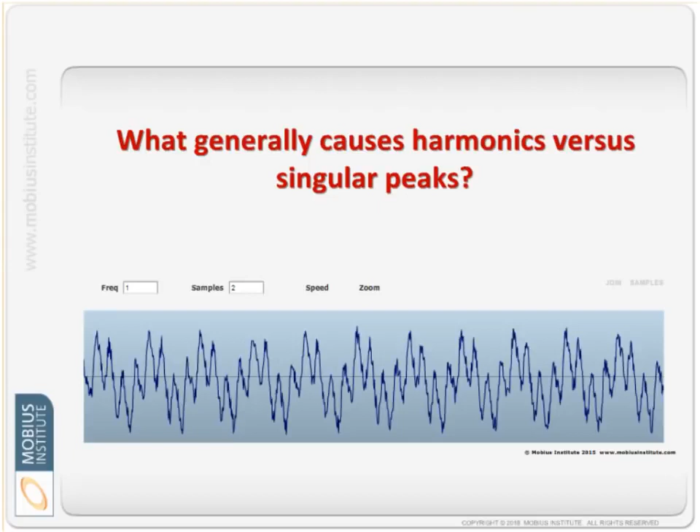They're little harmonics, but they are harmonics. So if there were stronger impacts, we would see actual harmonics that are much higher in amplitude. So what I thought I'd show, if it was a time waveform that looked like that, not purely sinusoidal, we would see harmonics for sure.

Now I'm going to use a little simulator that is there to demonstrate what happens when bearings are damaged. Just bear with me for a second. So what we're seeing over here, there's the sine wave of just the shaft turning and the bearings are just fine. But if I have a little bit of damage on the outer race here, then each time the rolling element rolls over that area of damage, we get this little spike.

Now the way this simulator works, it's just trying to say, hey, if it's just a tiny little spike, you may not see anything in the spectrum. But what I'm going to do is make the spike much worse, and you see these harmonics come up.

And in fact, we can just isolate the spikes, and that's what's causing these peaks. Now, in this instance, the frequencies generated aren't harmonics of 1x. This is my 1x peak, my running speed peak. So there would be 2x, 3x, 4x, and because it's a rolling element bearing, I'm actually seeing harmonics of 4.22 - I happen to know that. So at 4.22, 8.44, 3 times that, 4 times that, 5 times that, we get peaks in the spectrum. That's probably enough said about harmonics, but that's why.

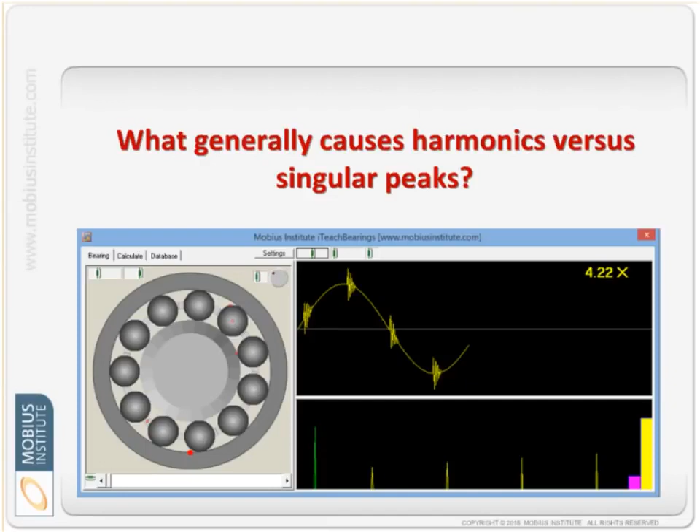So anytime you see harmonics in the spectrum, you've got to think, what is happening inside the machine? Is it just slight distortion, which gives weak harmonics? Distortion because as the shaft rotates, maybe it's more stiff vertically than horizontally, so it gets a little distortion, like it's not a pure sine wave. If you see really strong harmonics, you've got to ask yourself what is impacting.

Why does mechanical looseness generate multiple harmonics of 1x vibration? I kind of just answered that question. Mechanical looseness involves impacting, either within the bearing itself due to excessive clearance, or between the outer race and the housing, or even just the machine as it vibrates up and down. We might have impact - there's rotating looseness, mechanical looseness.

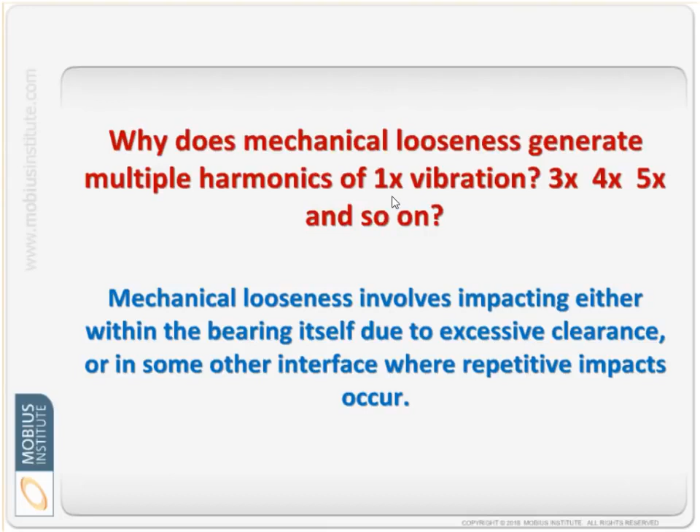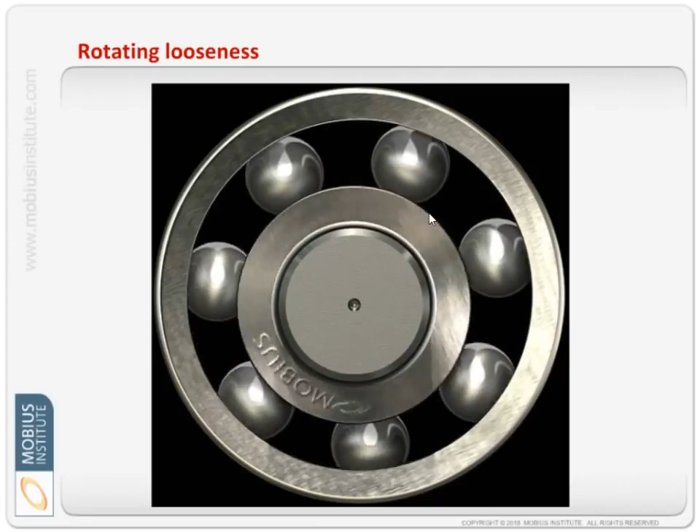But anytime we have, for example, a once per revolution impact, we will see 1x harmonics - peaks at 2x, 3x, 4x, and so on. In this animation, hopefully you can see, as it rotates, this impacting going on, and that could happen also between the outer race and the housing, if it's loose. My animations are really exaggerated, but when there's looseness, we get that impacting.

Now, I've mentioned the word 1x a few times, and the question is, can you elaborate a little more on 1x, 2x, etc., and running speed? What is that, and how does it correlate to determining where on the machine the fault is located? So, number one, 1x simply means 1 times the running speed of the machine. Let's say we've got a motor turning at a particular speed in CPM - you often quote it in RPM, but a lot of people work in Hertz as well. So it has a speed.

Well, because a lot of fault conditions occur as the shaft rotates once per revolution - for example, unbalance, we get this force once per revolution, as you'll see in a moment. Rather than quoting what it is in CPM or Hertz, which is meaningless unless you happen to know the speed of the machine, it's easier to just say 1x, 1 times the running speed, 2x, 2 times the running speed. For most vibration analysts, as soon as you say there's a big peak at 1x, their mind goes in one direction. Oh, the vibration at 2x has increased - their mind goes in a different direction. 3x, 4x, 5x, same thing.

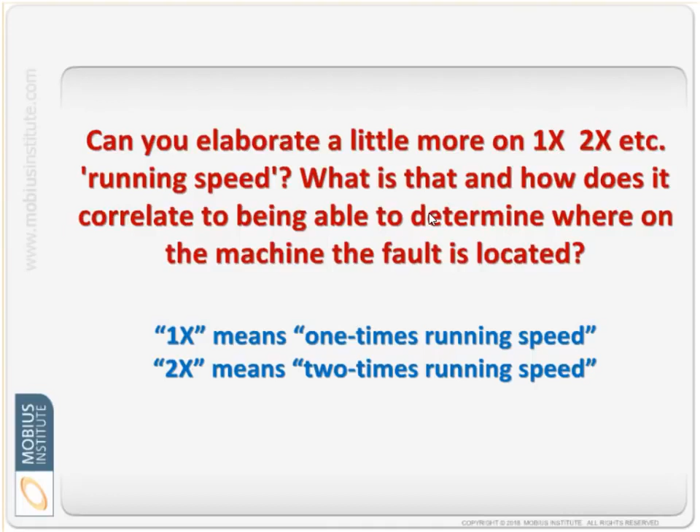We know what that means - we don't need to know what the speed of the machine is. But if someone said to us it's going up at 2,900 and something, you'd have to say, well, I'm going to assume I know what the running speed is - it takes an extra step. So that's the first part of the question.

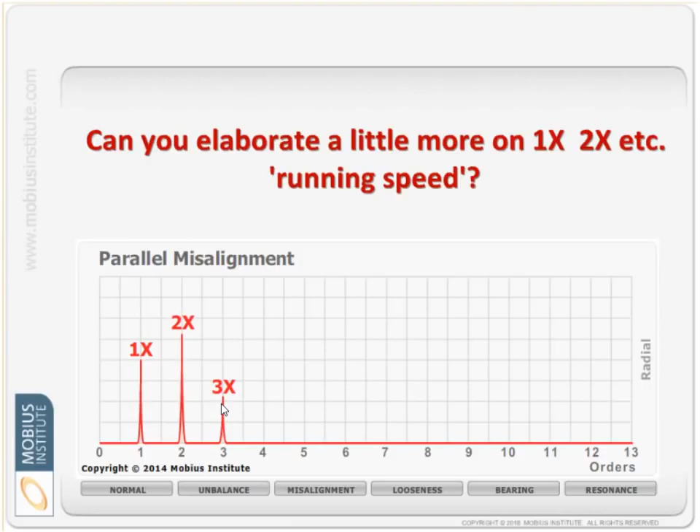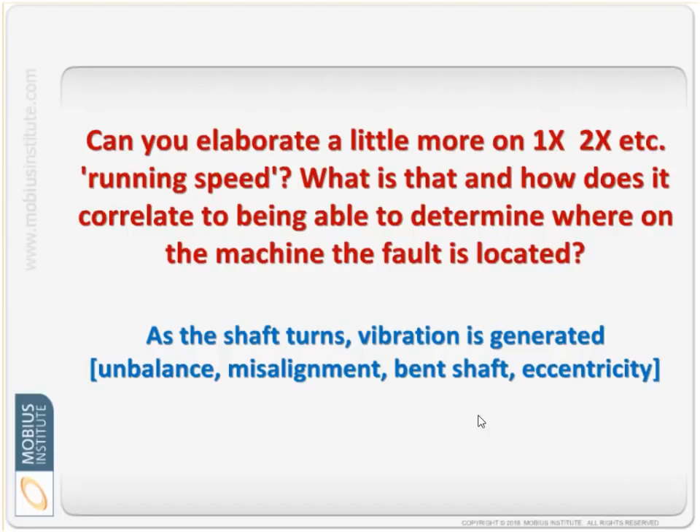So, number one, in terms of the 1x vibration, we often see that because of unbalance, in some situations misalignment, if the shaft is bent, if there's eccentricity, and really anything where once per revolution we've got some sort of force. Normally, even with just a normal machine, we will see vibration at once per revolution at 1x. You'll never balance a machine so well that there is no vibration. It may not be obvious in some cases which peak is the 1x.

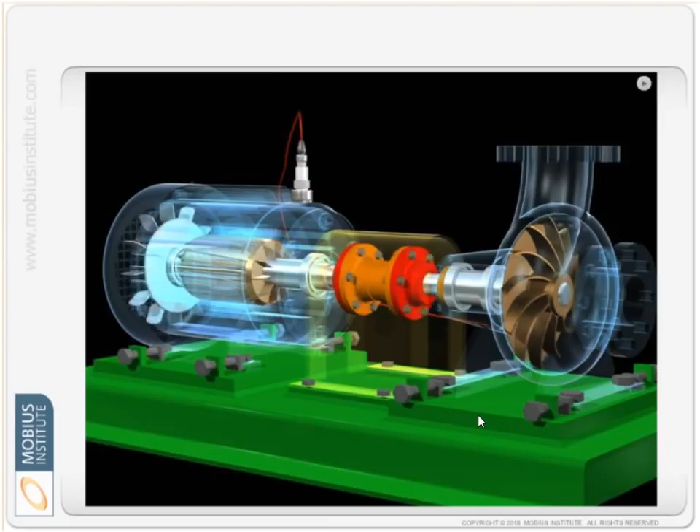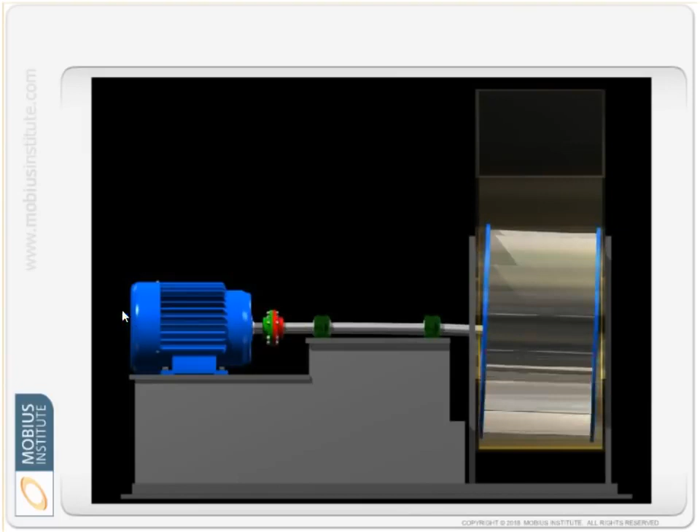If, for example, we have a fan, because of unbalance, once per revolution we've got this centrifugal force that makes it wobble, as you can see there. That impeller is actually turning in a circular motion, but it's also rocking back and forward axially. So we would see vibration both axially, if we measured in that direction, but also radially, vertically and horizontally. We would see 1x vibration.

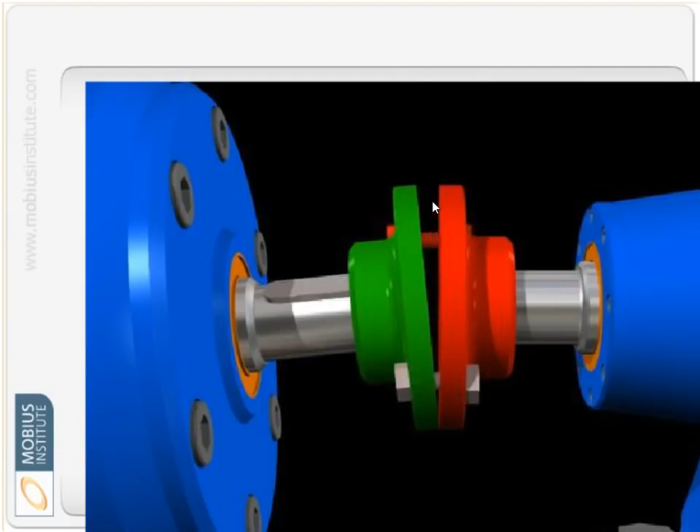In this case, this isn't the best animation in the world, particularly with that great big key there, but if there's angular misalignment, then once per revolution, what I'm trying to show is that the bolts are being stretched at the top. This is obviously very exaggerated, but just to make the point that once per revolution we've got this force in the axial direction, and we can see high 1x in that case.

Now, we can have actual forces that generate the 2x and 3x vibration, but again we can say, due to the misalignment, or for example a cocked bearing and a bent shaft, we can see vibration at twice running speed. But there's always this debate about whether the machine is creating a force twice per revolution or three times per revolution, or whether it's just generating something at once per revolution, but because of the non-linearity, it's not a simple rotating force, it changes as it rotates, and we see peaks at 2x and 3x.

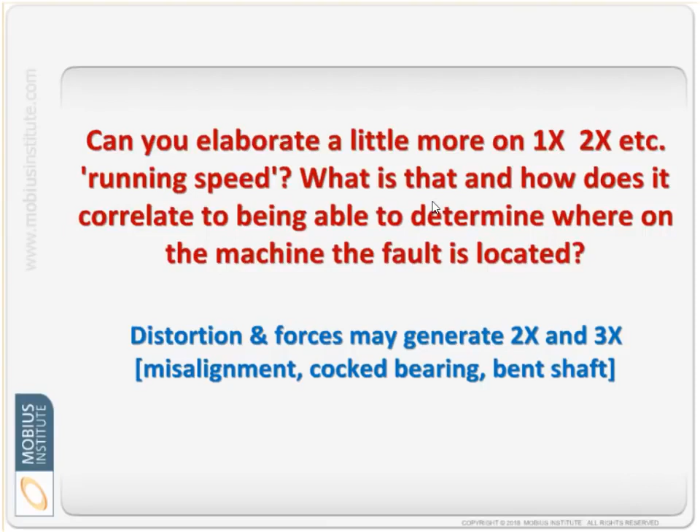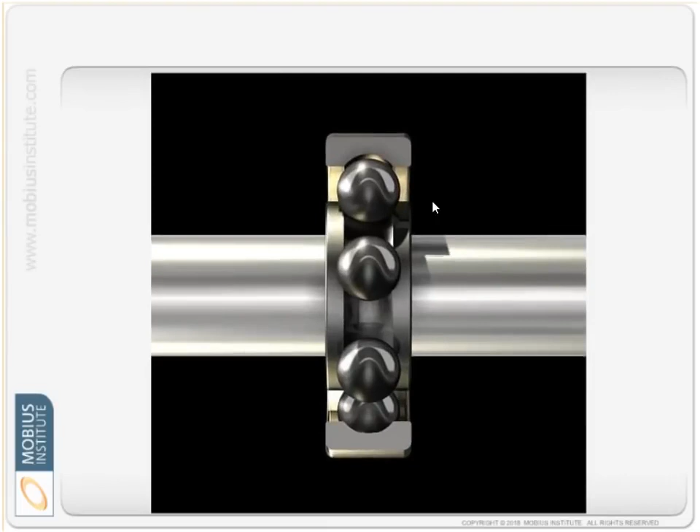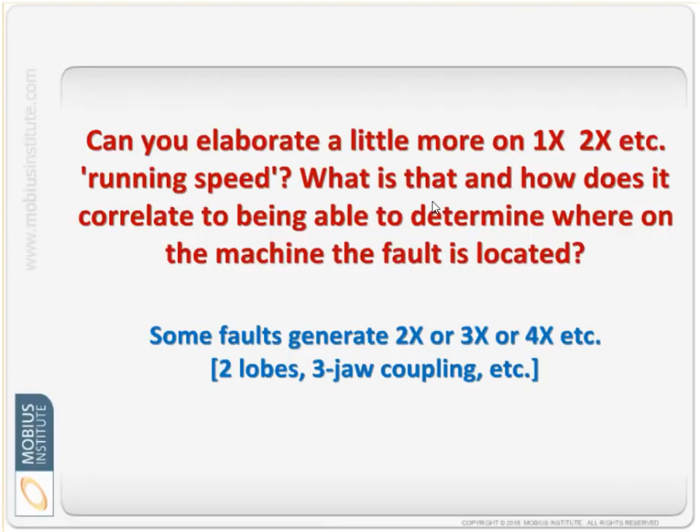So in this case you can see a very bad case of offset or parallel misalignment, and we expect to see 2x vibration, for example, and perhaps some 3x and 4x. If the inner race was cocked on the shaft, then each time it rotates, it generates a 1x vibration, but we often see peaks at the 2x and 3x as well. And of course, we'll also see vibration at 2x, 3x and 4x for physical reasons. We could have, for example, a machine with 2 lobes, or a coupling that has 3 jaws or 4 jaws, and that's going to generate vibration as well.

So to answer the question, I wasn't sure exactly what you wanted to learn, but the fact is that with time waveform analysis, and especially phase analysis, it enables us to determine what the fault actually is. Because all of those things we just saw are physical motions within the machine - the bearing wobbling, the shaft wobbling, the fighting over the coupling, both offset and angular. It was all physical, and that makes the machine and the bearing housings respond in a certain way. So if we compare the motion vertically and horizontally, we can get a clear idea whether it's unbalance or something else, and that can lead us to certain conclusions.

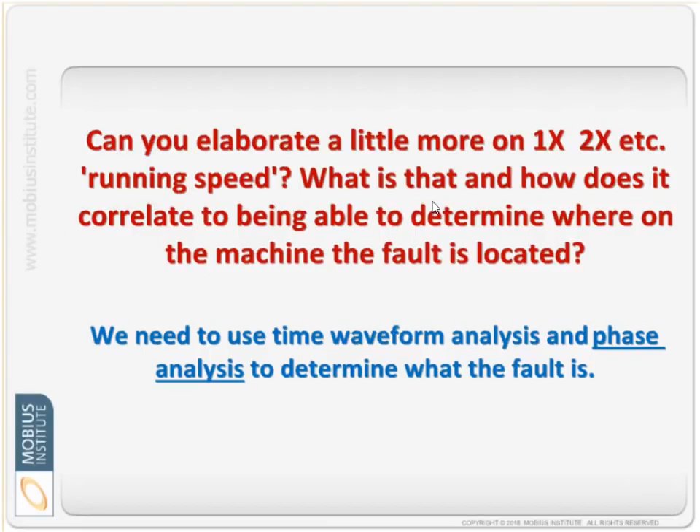We can see how the phase changes from one side of the coupling to the other side, and look, there's a lot of ways - it just gives us timing information, and that is the way to really properly solve why you're seeing vibration at 1x, 2x, 3x, and particularly those frequencies.

Okay, so the next question - I've ordered these in a certain order so they're all relevant to each other. All these analyses depend on the assumption that we have the running speed estimated correctly. Yes, it really does. You really do need to know what the running speed of the machine is.

Because how do you know if it's unbalanced if you don't know what the running speed is, and therefore whether you're looking at the right peak? Yes, you need to know, but if it's challenging to find out from the spectrum, because often the 1x peak is quite high and is the dominant peak at the low frequency end of the spectrum, if you don't know, there are tools that let you measure it.

There's a variety of tools, even a little stroboscope, and other ways. And even with the spectrum itself, you can reverse engineer it. I'll make additional comments later, but when looking at a spectrum, you can say, well, if this peak was 1x, then I'd expect to see other peaks at multiples if I've got fan blades, pump vanes, or gear teeth. There's a certain way to deduce which is the 1x peak. It's not perfect, but once you have an idea of what it is, it's possible to make it accurate.

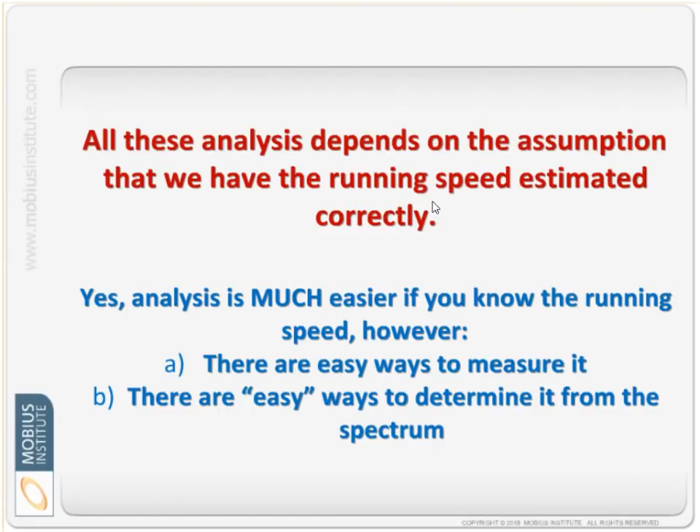For example, if I knew I had 6 vanes, I can go to the 6x peak, figure out the frequency, and then divide that by 6 to get a much better estimate of running speed if I need it.

So how can we ensure that we have the correct running speed estimated? As I just mentioned, ideally we measure it and we know for sure. But if I knew there were 6 pump vanes or 31 gear teeth, I can look for those peaks and say, well, if that's the gear mesh frequency at a peak that's 31 times running speed, I therefore know what the running speed is. There's a lot more I could say about that, but let's move on.

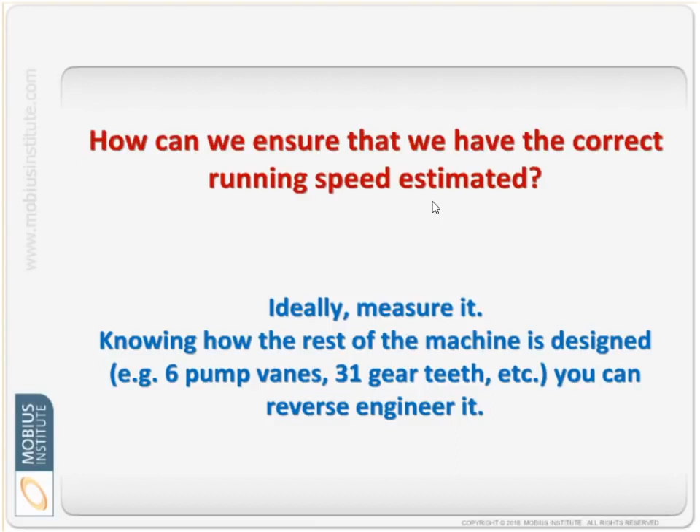Here's a good question: what is the best conference to attend if you're interested in vibration analysis, condition monitoring, and reliability improvement?

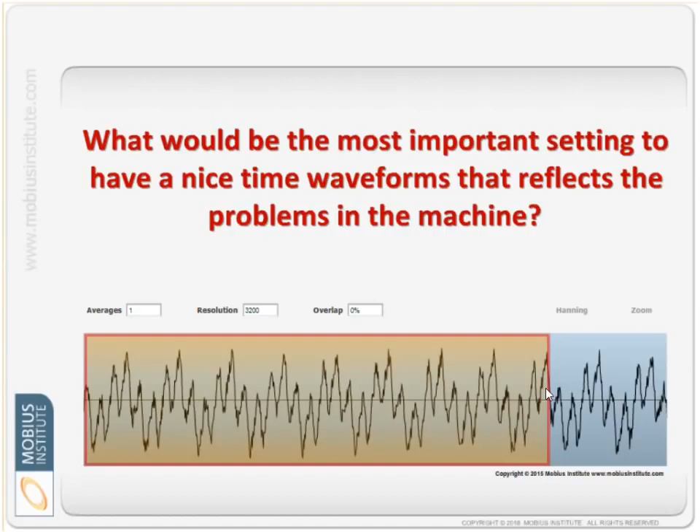Sometimes it's good to have this long time waveform because, as I mentioned a moment ago, we can see beating, we can see cavitation, we can see problems in gearboxes that are hard to detect otherwise. I hope this isn't too confusing.

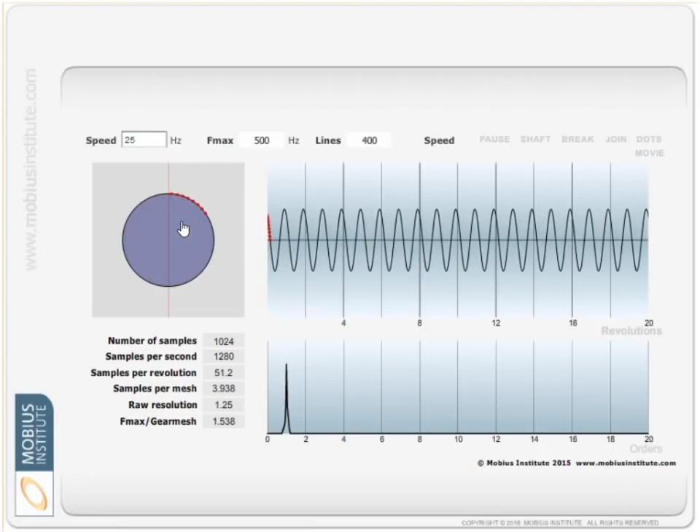I'm getting into a bit of detail, but the idea is a shaft turning, or if it's easier, a gear turning. The vibration analyzer is taking a sample of the vibration from the sensor with a certain time interval based on that Fmax setting. Even though it's a digitization process, converting from a voltage that came from the sensor to something digital we can use inside the software, it corresponds to a time delay which corresponds to the physical thing we're testing, and samples are taken as the gears are meshing together. We can only see one gear, but you can see the time between each sample.

You can see the little red dots represent the actual values we use to construct the time waveform. This is a bit complicated, and I apologize if you're new to vibration, but I can demonstrate a couple of things with this. These settings you see here are with the speed of rotation at 25 Hertz, or 25 times per second, and an Fmax of 500 Hertz.

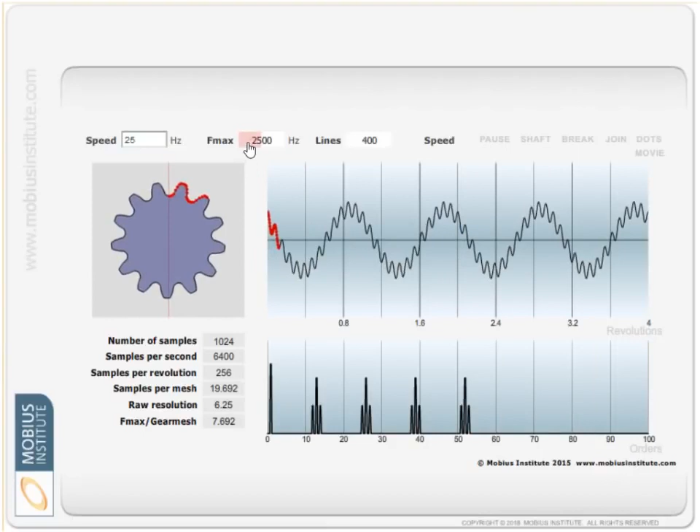So now I'm up to 2500 Hertz. But watch what happens as I'm changing this, watch my waveform - this is for a specific resolution. Watch the spectrum down here and watch the waveform as I keep increasing it. There's 2000 Hertz, 4000 Hertz now, meaning I'm getting much more spectrum, and you can see the changes to the time waveform. As I drop it down to 2000, to 1500, to 1000, as I reduce the sample rate, this is dictating how many samples I actually get - how many seconds, or milliseconds, there are between the samples.

If I now change the resolution, I go from 400 lines to 800 lines to 1600 lines, I'm getting much better resolution - the peaks are much clearer, but I'm getting more revolutions. So if you're not sure, perhaps go back and play that bit back. Hopefully I said everything that was important there.

On to a totally different topic: does the keyphasor notch create unbalance? Well, technically yes, it does. It's a loss of mass at that particular point, so it does create unbalance. But when we balance it, that unbalance is basically compensated for. It is always worth understanding that yes, it does create unbalance, and inserting the key as we're coupling the shafts together also creates unbalance. So you've got to be careful not to balance a rotor and then use a key that causes unbalance.

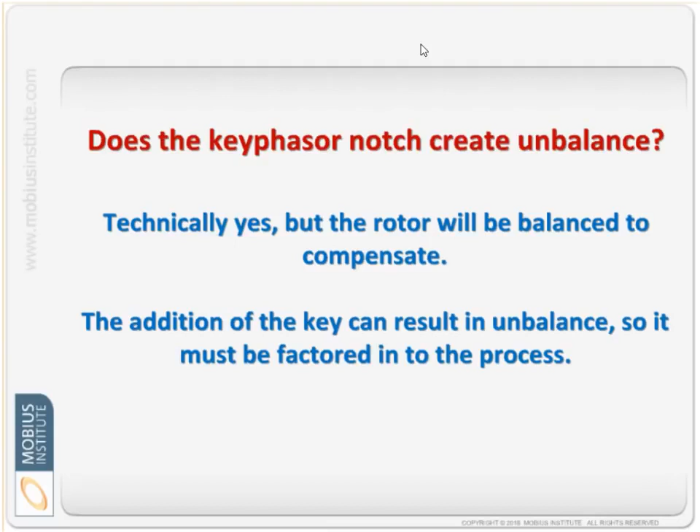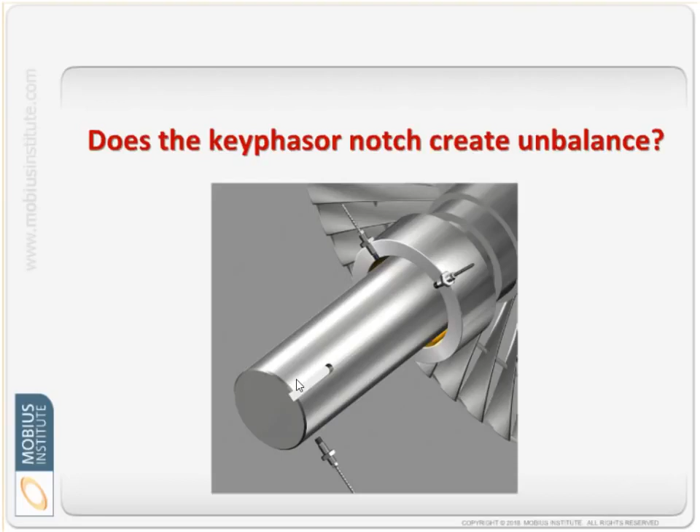Just in case you're wondering what this question is related to: the keyphasor proximity probe is aimed at the key way, or a key. Our probes are sitting up near the bearings, but you can see that this will create an unbalance there. Of course, in a machine like this, we've got a great huge long rotor, so the question is what impact does it actually have? But anyway, the balancing process deals with it.

Another question: what does it mean if one sees half of a specific frequency in a spectrum? For example, a fan has 14 blades but produces 7x. That's a really good question, and it's probably a bit more advanced - not one I've got a really easy answer for. If you have extreme distortion, like the looseness I was talking about, sometimes we get half of that frequency. In the case of running speed, the looseness generated at running speed, we might see peaks at half running speed, and sometimes a third running speed.

So that's one possibility. Another thing is that if I happen to have a natural frequency at 7x, even though I've got 14 blades, I can sometimes excite that resonance. It's a long story, but I can excite it.

There's also this thing called common factors, when you have interaction between, for example, the fan blades and the diffuser vanes, and same in a pump as well. But we would need a common factor of 2.

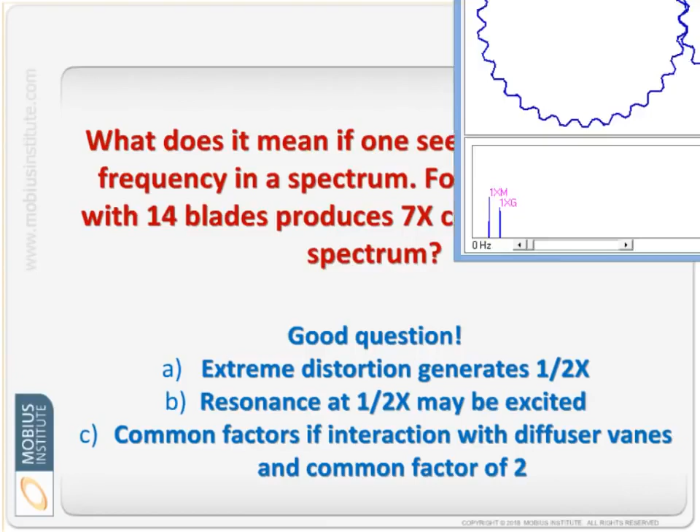Now this is a complex point, so I've got my simulator here. In this case I've got 30 teeth here, and 18 teeth here. Now look, this is really complicated, probably too detailed for this sort of a presentation.

But if we had pure prime numbers with these teeth, what I'm going to do is bump that up to 31, bump that to 19. I'm going to pretend to damage a tooth, so there's our damaged tooth. I'll highlight it to make it easier.

Now what happens if that tooth was damaged, it comes into mesh here and it kind of damages that tooth. And then when that damaged tooth comes into contact with this gear, it damages that one. Now I'm talking about over lots and lots of rotations.

So let's speed that up. If we watch for long enough, basically all the teeth end up turning red, and we get even wear. All the teeth share the wear.

But if we don't have a prime number of teeth, I'm going to fix them all and change this to a different combination, just because I know this will come up with the numbers pertinent to the question. I'm going to damage the tooth, and we're already highlighting it.

So if I speed that up, a funny thing happens. These teeth do not mesh with every single tooth on this gearbox. If we watch for a while, what we will see is that every second tooth gets worn.

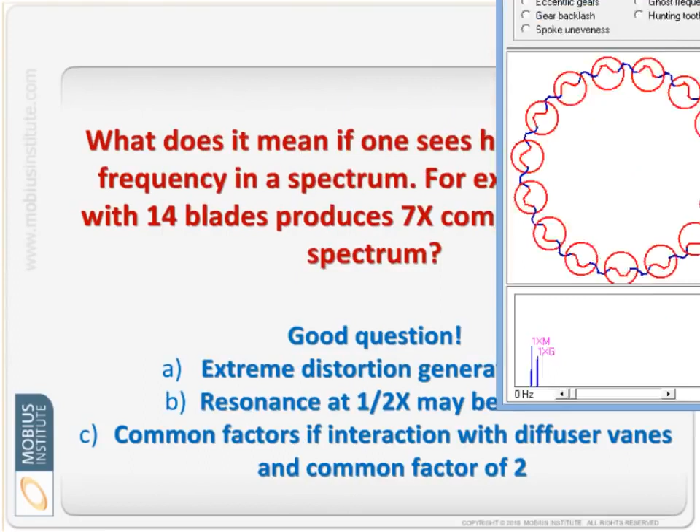So we can see peaks in the spectrum. In fact, I can simulate it here, and we have this gear assembly phase frequency peak, but like I say, we can see that in other machines as well. Okay, I think it's enough said about that particular topic, but that's a possibility. I hope I'm not forgetting another reason, but anyway.

Okay, so here's another question. What is HFD? It stands for high frequency detection. Shock pulse, it stands for shock pulse. Is it an overall value within a high frequency band?

Well, sort of. So what happens, and I'll show you some animations in a moment, with certain faults, particularly as bearings cause impacts - for example a rolling element impacting a damaged area on the outer race or inner race or on the rolling elements themselves, or when gears mesh together and there's metal to metal contact because there's a damaged tooth, and in other cases.

In addition to the vibration that you might expect, we also get these stress waves or shock pulses. That's why it's called shock pulse. We get these shock pulses, and it generates high frequency vibration. It's very low amplitude, so we can't see it in the normal spectrum, but we see it at very high frequencies, so we can specifically go hunting for it.

Now, one way with techniques like HFD and PeakVue and just normal enveloping, it's sometimes called, or demodulation, or peak impacting demodulation, I've heard it called as well. With all those techniques, basically what happens is the vibration analyzer looks at the frequencies above a specific frequency.

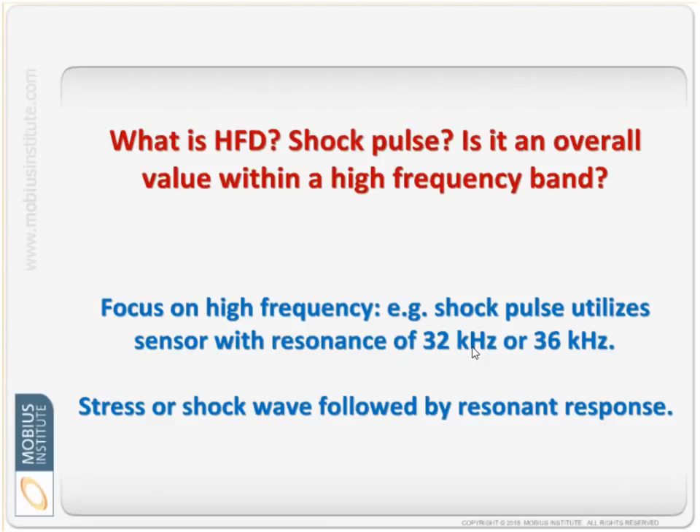How can a lubrication problem be detected using vibration analysis? High frequency techniques, the ones we just talked about, and then you can watch for the bearing failure, because lubrication problems often lead to bearing faults - but it's the high frequency techniques. One way to do that is with that high F max I mentioned before.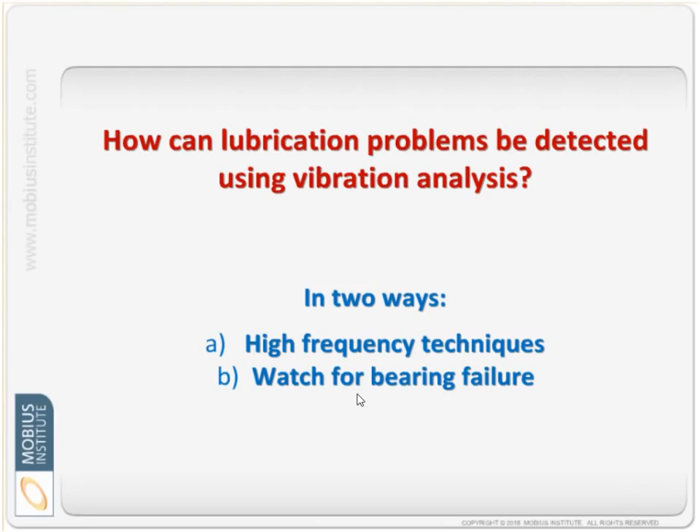I should explain what happens with a lubrication problem. This might be a bit confusing, but imagine you could get smaller and smaller so you could go right down where the gears are meshing together and the rolling elements are rolling over the inner race, and we looked at it at a microscopic level, right where those two surfaces are together and moving relative to each other. That's where the lubricant actually keeps those surfaces apart. The surfaces are, from a microscopic standpoint, rough.

If the lubricant's doing a tip-top job, it keeps those surfaces apart, and it will generate a bit of noise - we can listen to that noise with ultrasound. But from a vibration point of view, it just generates noise. There's no periodicity, so there's no peaks in the spectrum, and the time waveform's kind of boring. But boring is good with vibration analysis.

But if the fault gets worse - in other words, we don't have as much lubricant, or it's contaminated with water or something like that - the surfaces start getting closer together, really close together, exaggerated. Now those rough surfaces are actually impacting each other as it's rolling along, or the teeth are meshing together. But it's still not periodic - it's like bang bang bang bang bang bang, just whenever these little mountains and troughs collide with each other, we get that bit of vibration.

But I still haven't mentioned what criticality is, so let's do that. On a really simple basis, how critical is a piece of equipment? Is it moderately critical? Is there a major consequence of failure, or an extreme consequence of failure? Unfortunately, most people think of equipment just this way, or maybe even simpler: it's critical, or essential, or non-essential. It's just as simple as that.

If you look at a production line, you might say if any one of those machines fails, the production line stops, so therefore they're all equally critical. Well, no, that's not the case. What do you mean by the consequence of failure? All of these statements say the consequence of failure gets worse as I go from left to right—this gets a score of 1, this gets a score of 5, and this is the worst thing we can think of.

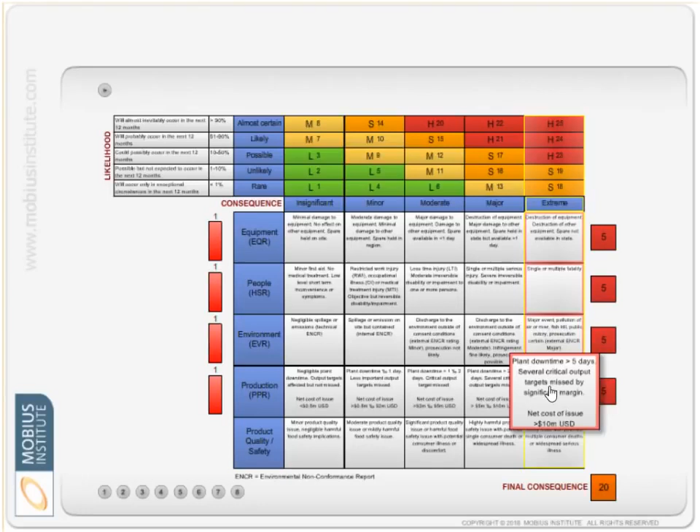But just from an equipment failure point of view, what about people—minor first aid or no first aid, versus single or multiple fatality? What about from the environmental point of view—this is really bad. What about from a production point of view—no impact on production versus more than $10 million of loss if we lose this machine. What about from a customer quality and impact point of view—here, our food product that we're producing kills our customers. That's pretty bad.

I could go into a lot of detail here, but what we need to do is say, for each piece of equipment, what is the consequence of failure? And it's going to vary in each of these categories. Secondly, we have to say, how likely is it that it is going to occur?

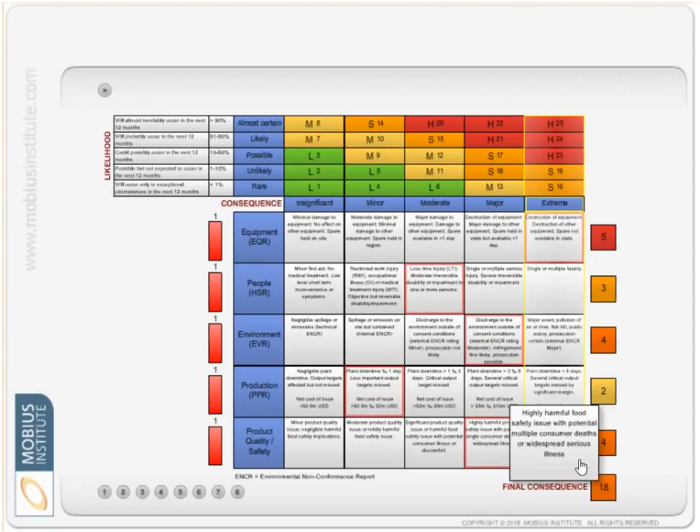Because you may have a whole lot of machines in a row that you think can all stop production, but are they all capable of poisoning the customer? Are they all as costly to repair? Do you have the same sort of spares for each one? Are they all as reliable as each other? You may have one machine running for the last 15 years doing a great job, and another machine that fails more frequently. I need to pay more attention to that one that fails more frequently.

It becomes more critical. Criticality is the combination of the consequences of failure and the likelihood of failure.

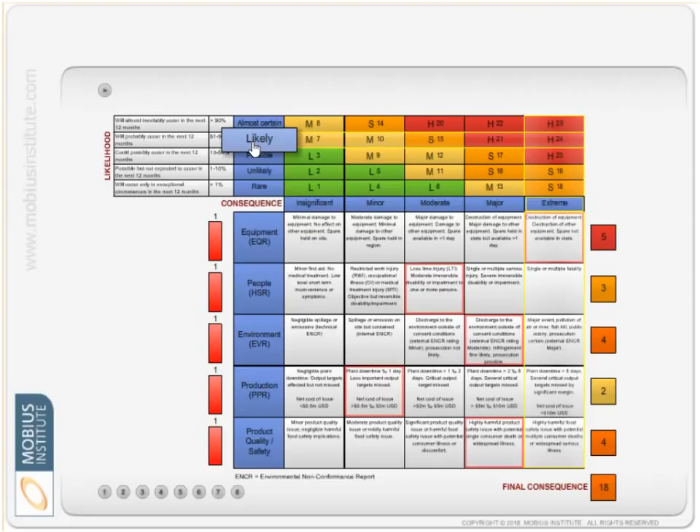But we need to go a step further, because it's not just the likelihood of failure being initiated, it's the detectability. I might have a machine that fails quite frequently, but I'm 100% sure I'm going to detect that it's occurring, so it never gets to fail. So yes, we can be worried about these things, but I'm so sure that my protection system will function that the detectability is very high. Therefore, it actually reduces the criticality of the equipment.

Without that protection system, we would have had a highly critical piece of equipment, and that's what justified the detectability. That's what goes back to that ROI question recently. Here I am, already 50 minutes, I apologize, but hopefully it's useful. So we justified the expense of the protection system because we needed the detectability to be very high.

I could talk about this a lot, but this really helps you justify programs, both from a cost point of view and to decide which machines need to be tested. We need a combination of detectability, reliability, and consequence of failure, which all creates the criticality ranking.

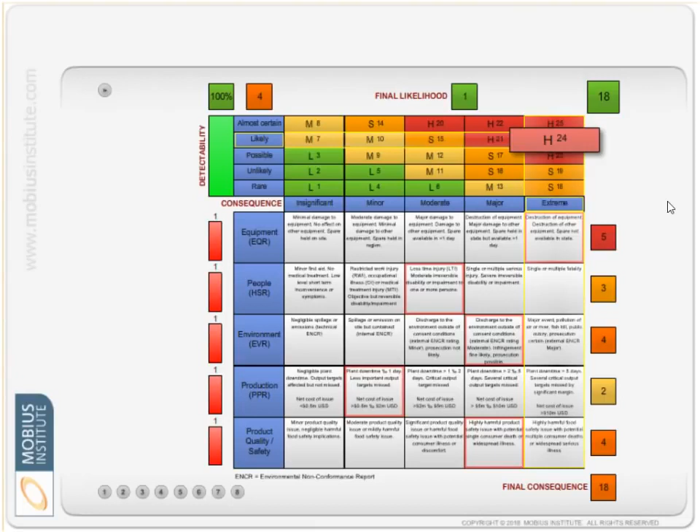Okay, on a different topic, how the trends could be used to analyze the data. Something I didn't mention in my webinar actually, and I should have, because whereas we measure the vibration, we can look at just the overall level, and we can look at the spectrum and time waveform and phase and orbits and things that I did mention.

With the overall level, and with chunks of data extracted from the spectra that we've been collecting, we can see how machines are changing over time. Because to a very high degree, if the vibration isn't changing, then we become less worried about it. Even if the amplitude's a bit high, we can say, well, it's not changing.

Now, it doesn't mean we don't need to consider whether that's a safe way to operate the equipment, and we might be inducing failure. But in terms of priorities, you need to deal with the machines where the vibration is changing before you deal with the machines where the vibration isn't changing, assuming that the criticality is the same. So we always need to remember criticality. We need to deal with our critical machines because the risks are much higher.

So with our trends, we can see how quickly the problem is developing. We can see the trend going up quickly means that the condition is degrading. But we can also extract frequency bands from the spectrum. We can take the vibration just around that 1x peak that I talked about almost an hour ago. If we see that changing, we can say the unbalance is getting worse.

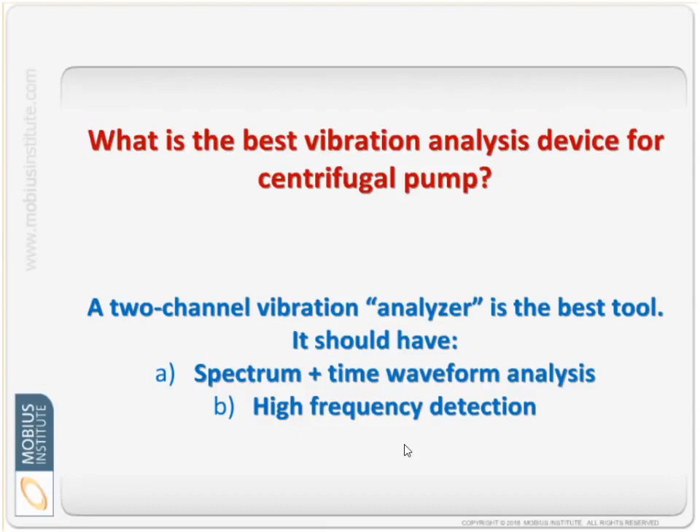So now, which actual commercial product? I couldn't tell you that. We work with everyone. Everyone has a great product.

But what we're going to do on our pump is we're going to use our vibration analyzer. We're going to put the sensor on there. We're going to get a little spectrum from it, and I'm going to measure maybe in the horizontal direction as well. I'm going to measure over on the pump, and I'll detect all sorts of things.

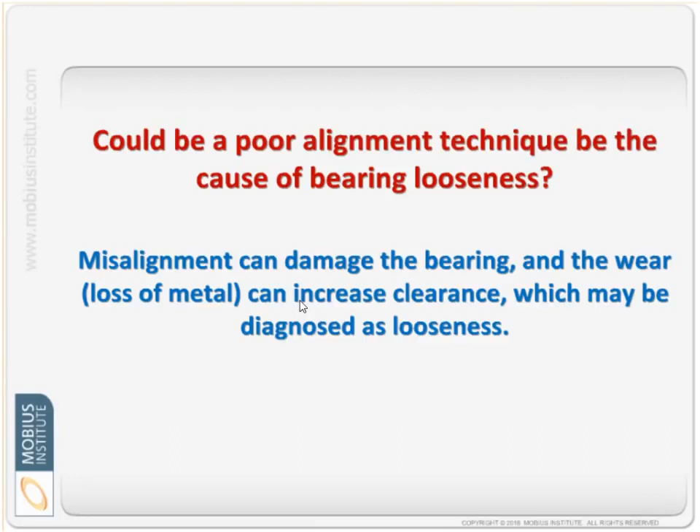Could a poor alignment technique be the cause of bearing looseness? Now, I had to think about this and think, could you align a machine so badly that somehow you made the bearing loose? But what can happen is misalignment can damage the bearing. So with misalignment, you're putting a lot of extra load on that bearing, which will cause it to fail. It's inevitable, it will fail prematurely, in other words, earlier than it really should have. And so with that wear or loss of metal, or whatever you want to call the damage that occurs, we can increase clearances within the bearing, and we may diagnose that as looseness, but that's a real late stage bearing fault. I think that's a fair enough answer to that.

If familiarity with the equipment is very important, do you recommend in-house vibration programs over contracting the service? So first I should comment on the basis of the question, and I absolutely positively believe that it's helpful to understand the machine and its failure modes. If it's just this big metal box and you sort of wonder what's inside there, it's much harder to do vibration analysis. Much harder. If you know what's inside, then you can say, well, okay, I can imagine now if I'm seeing those harmonics that we talked about earlier, or a peak at 6x, or whatever it is we're seeing, you can sort of think about what's inside the machine, or if we see an increase at the pump impeller rate, the pump vane rate or blade pass rate, you can think about what's inside and make a better judgment. And that's why it can be that a person who was a mechanic on those machines and repairing those machines can do very well at vibration analysis, because they at least understand what's going on inside.

So then the question is, well, if you're providing that as a service, can you still do a good job? Well, the answer is yes. I mean, sometimes the consultants may be more familiar with the machines at your plant because they've seen those machines at other plants, more familiar perhaps than people at the site. There can be vibration analysts who never take the time to really understand what's inside the machine. So that's one question, but either way, who's ever doing a vibration analysis, you should take the time to learn about the machines and ask all the questions that they can.

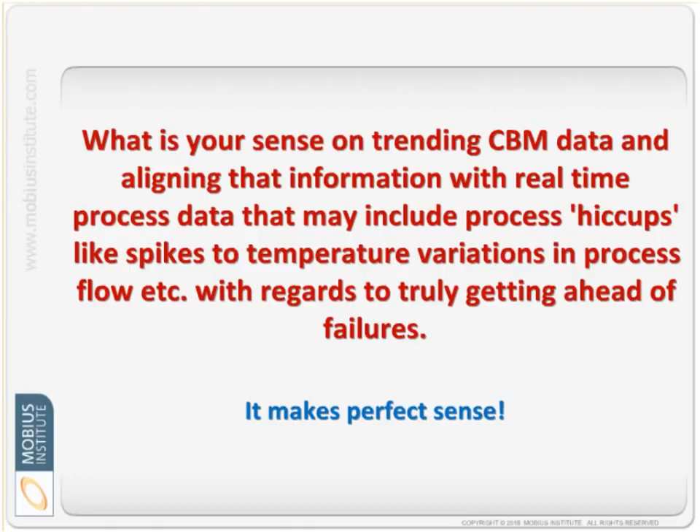So it is very useful information, and for sure, if we have an online monitoring system, or even if we haven't, if we can look back and say, this vibration change we observed happened at the same time that some other process parameter changed, then we can investigate the reason—why did it change that way? It really is good information to have.

During the presentation you said that the measurement has to be taken at the same conditions, but what about different process conditions between measurements? Are those measurements useless?

No, definitely not useless, it just poses a bit more of a challenge. The best thing for a vibration analyst is where the condition of the machine does not change from test to test to test, so when you see a change in the vibration, you say the only explanation is that the condition is changing, and now you have to interpret what that change means.

But if the process conditions change and you see a change in the vibration, you're then asking, why is that so? Was it the machine's mechanical health that caused the change, or the conditions?

When you dive into vibration analysis more deeply, there's an awful lot you can learn even with varying conditions. For example, if you've got bearing faults, you always see harmonics at non-synchronous ratios of running speed, like 3.09 and 6.16. Regardless of the machine running speed, you will see these peaks. They are multiples of running speed, which is why I talked about orders earlier - 1x, 2x, 3x. If you know what the running speed is, even if it changes, you can still figure this out.

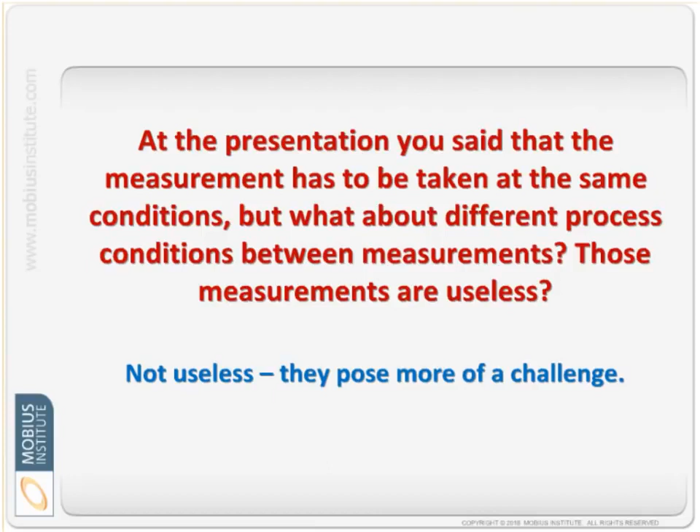Because even if the speed doesn't change, loading can really affect everything - from the magnetic fields inside the motor and the amount of slip, to what's happening as the liquid goes through the pump, and so on. That's why it helps to really understand your machines and not just look for patterns and jump to a conclusion.

Oh, there's that terrific question again. What, the same question again? What is the best way to be trained?